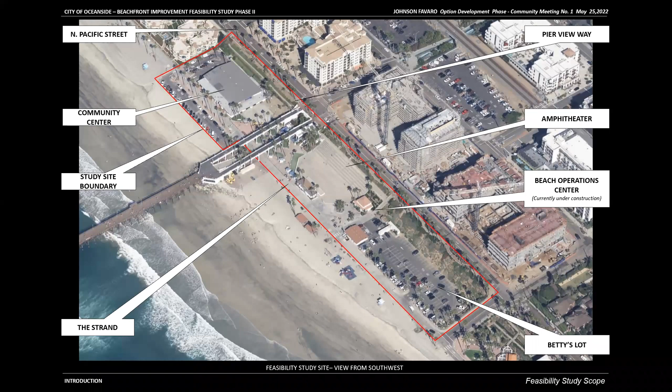I did want to stress that, to remind everybody of the boundaries of the study site. North Pacific forms the eastern boundary, the Strand the western boundary, with the community center at the north end and Betty's lot at the southern end. The goals of this study are for us, with you, to understand the needs and community priorities associated with this important site and its facilities, and also understand the current condition of those facilities.

So that's a key part of what we've been doing with you. But simply put, this is really planning for future capital projects that are coming your way. It's just a fact that buildings and infrastructure deteriorate. You know that with your own homes. If you wait till the last minute when the plumbing goes and you don't have plans, you don't know how much things cost, you don't know what you're going to do, you're in an emergency situation.

This is really just setting up a planning framework. It doesn't mandate doing anything. That's your choice, when and how you proceed. But it gives you the information you need to effectively plan for when there might be repairs, renovation, or enhancement of these facilities. So our job with you is to understand the potential scope and budget of those future projects, if indeed they ever come along.

We do have a cost estimating consultant on our team, and as soon as we gather some information from you tonight and begin to refine some of the options and narrow them down, that cost estimator will help define accurate project costs. That's a key part of it - knowing what things cost, and even the cost to actually produce the projects and run and sustain them.

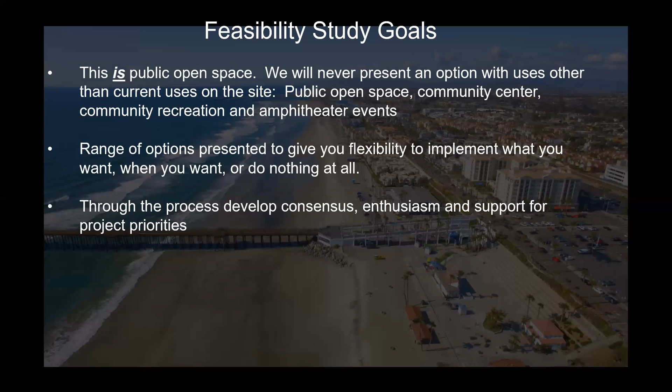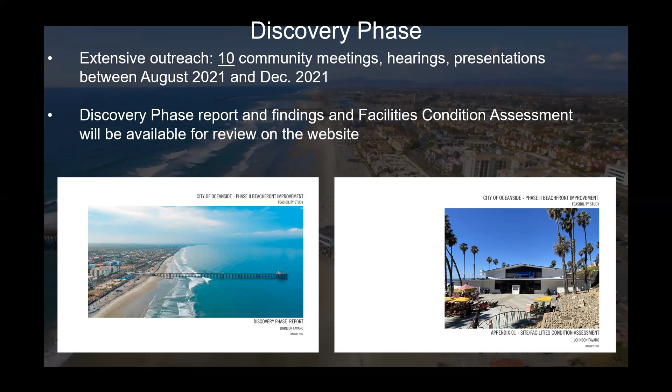I do want to remind people, I saw some people in the room who were talking to me, we did have an extensive outreach phase: 10 community meetings, all of your commissions and committees we presented to between August and December of 2021. There is a discovery phase report and a facilities condition assessment that will soon be on the website for you to review and go over the findings of that phase.

And next steps, just super briefly - following this meeting, we plan to go to Parks and Rec Commission on June 7th. And then we are proposing a second community meeting like this. We'll come back to you. This is the first of two in this phase.

We'll come back to you. We're proposing possibly June 30th, but that date's not totally confirmed. It will be confirmed, but sometime in that end of June timeframe.

And then going back after that, with that input from you at the second meeting, going back to Parks and Rec on July 12th. All of this aiming towards a tentative date of a city council study session, perhaps sometime in August.

So I think it's also important to step back. I know I heard a lot, and I said many times that I heard something new almost every one of those presentations. You were bored hearing me say the same thing for 10 presentations, but I heard something new every time. Just a quick summary - these are from my notes and things that I heard.

We heard so clearly: do not change a thing. What that means really is that the love you have for these facilities, the history tied to them, the feelings tied to them, and the families here that have used these facilities over generations - we know that and we heard that. I think that's the sentiment behind 'don't change a thing.' You love it. This is your home, this is your city, and these are your facilities.

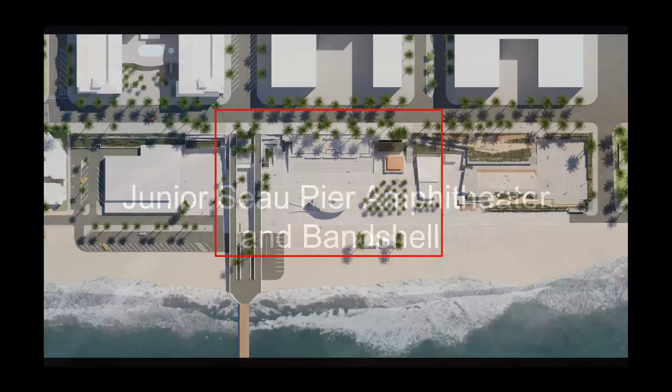So to jump right in with the options, we're going to start with the Junior Seau Pier Amphitheater and Band Shell.

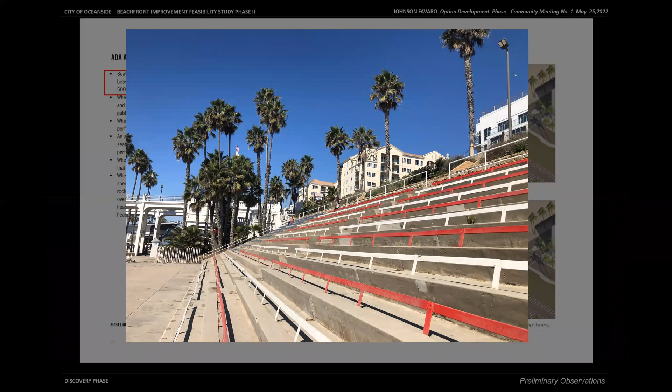First, something you know very well—I've said it perhaps a few times—the existing condition of the concrete in its current state of repair does need to be repaired because it will continue to deteriorate. So this is what I'm talking about, planning for the future. What do you actually do for the day of how you repair it? The issue of repairing a facility like that, the magnitude of repairing all of that concrete—you simply can't do it unless you address accommodation and access for the disabled. You can't spend that amount of money without updating it to current accessibility standards.

So what that means: we know with the current occupancy of the amphitheater that we need at minimum 13 wheelchair seats within that facility, and we need to distribute them. You can't put them all at the top and you can't put them all at the bottom. You've got to spread them out like able-bodied seating throughout the venue. You can't say you're going to sit here and everyone else gets to go to the stage and do all these great things—you have to distribute it through the facility.

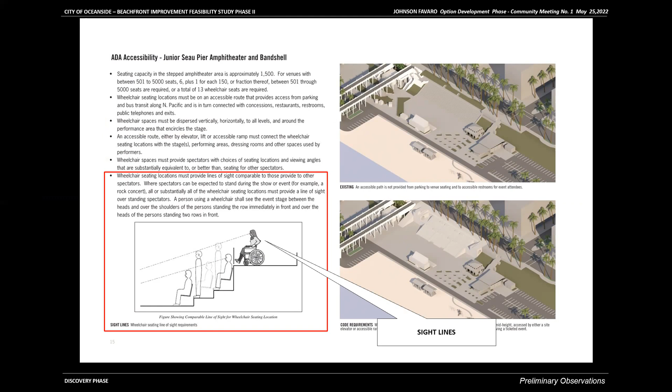And then even the geometric configuration of someone in a wheelchair—we have to take into account that a seated wheelchair has to be able to see over standing patrons in front of them. So you can see there's a kind of geometry to the steps of an amphitheater that accommodate the disabled, particularly those in a wheelchair at a performance. We simply have to take care of that with the repair of this facility. I had many people in the first meeting say, I may not be disabled, but I'm a little older and it's a little harder to get up and down those steps—I need those improvements as we go forward.

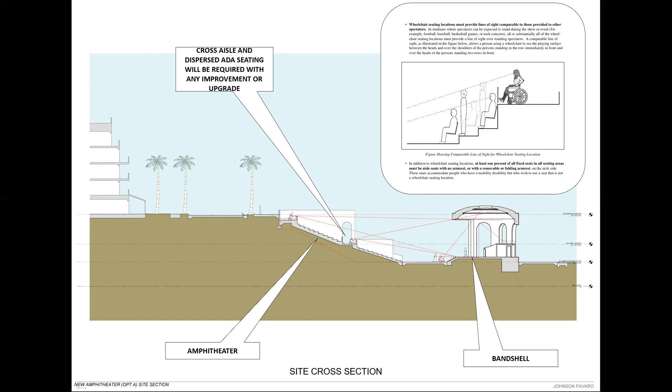With current codes, there are things connected with aisle width in terms of safety. I think many of you have probably been in the amphitheater, and if you have to leave in a hurry, imagine getting out of those narrow aisles—it's not as safe as current standards would require. There are code requirements in terms of the number of people in a row and how wide the aisle is to get by them. So we simply have to change the rake, or steepness, of the amphitheater to bring it up to current code.

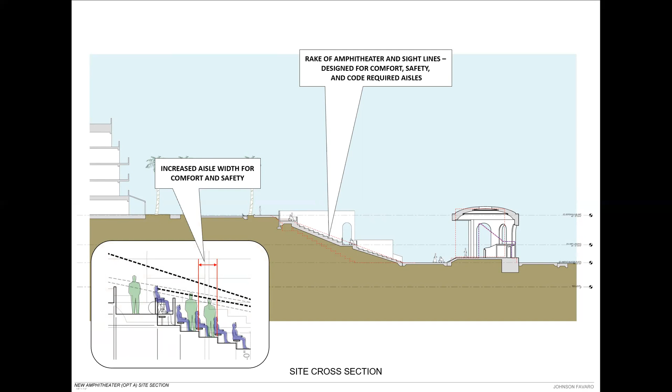And that's also an issue of comfort. Just to say, and we heard that as well, make the facility more comfortable as well as we potentially move through it. The band shell itself is about 24 feet tall.

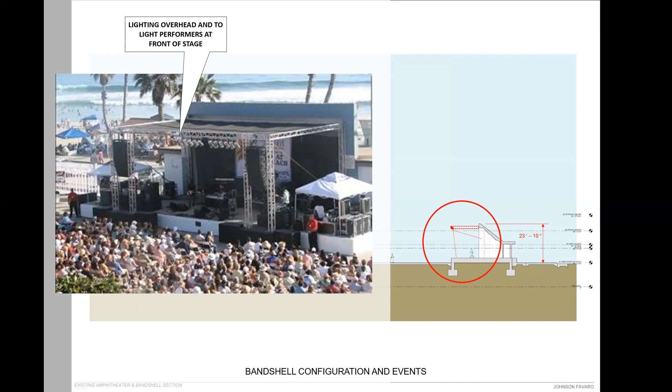You can see in this image, it's doing incredible work, but often the infrastructure that supports an event just has to hover and be hung outside of the existing band shell. You see the speakers there on the left—equipment's always kind of moving outside of the stage volume. Rigging often has to be built for just the simple function of getting lighting on a performer's face at the stage front. So every time that happens, you build the rigging, bring in the lighting, bring the speakers. It's typical of these kinds of events, whether community events or concerts, that ideally there is overhead rigging already in place supplying the lighting and sound equipment, so that you're not building that rigging over and over again.

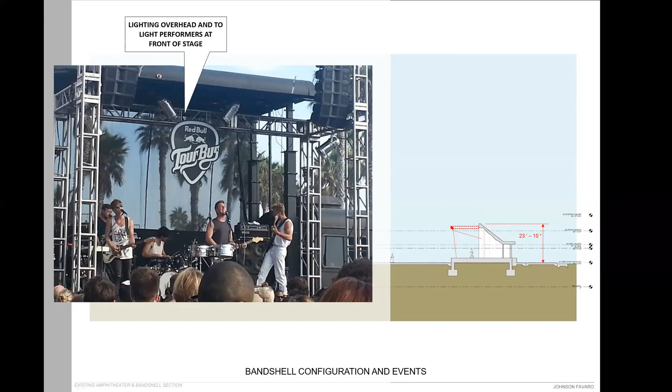You've had many occasions where the rigging exceeds the height of the band shell itself, the equipment spreading out to the edges, and even the creation of what we call a sound mix station to control the audio and visual connected with any event has to be created each time.

As we consider what we do with repairing this amphitheater, how to bring it forward to accommodate the technology that supports the community events, the festivals you currently have there, as well as other necessary events—so we do have a theater consultant on our team, and he gave a recommendation.

I want to emphasize, this is just a recommendation, not a hard and fast rule, but he gave a recommendation of a stage volume—meaning the interior space between the lighting overhead and the stage floor, and the front, back, and width of the stage—and that's 40 feet wide by 30 feet deep and 30 feet high.

And that's tied to what he knows, if you look across the spectrum of the kind of people who would use this premier facility. This is an amazing facility with the Pacific Ocean, as you know. The people who want to use that—what are they expecting in terms of the stage volume? This does matter in fulfilling that need for you.

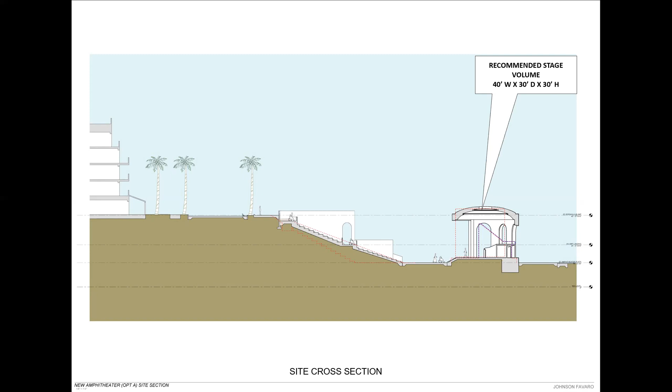But again, it's not a hard and fast rule. It really does support potentially the kinds of acts that could come here, but also just simply, it gets all of the people on the stage well lit and in a way that people can hear them and see them, viewed from the amphitheater seating. That is the goal.

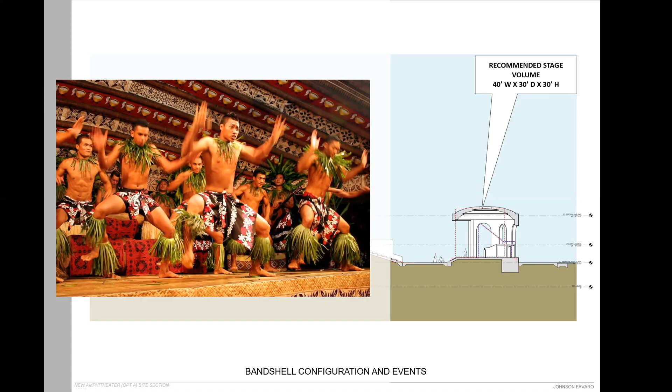So the band shell itself—if you look across this country, perhaps even the world, you'll see band shells that span from traditional on one side to very hyper modern on the other. But certainly we have to start with what you have and know what you have.

In one of the commission meetings, it was said, and I think this is accurate, that it has an Art Deco kind of influence to it, the kind of stepped shaping of that proscenium stepping back. And it is white, which ties to both the pier bridge, and also ties to what we think is a historic architectural legacy here of Irving Gill, followed up by your Civic Center. There's a certain materiality that it ties to those things.

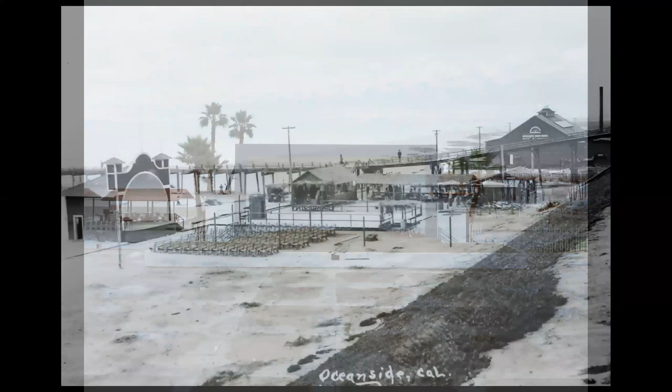But it's interesting—when we step back many years to the first band shell, it was a completely different band shell, much loved, I'm sure, by its community at the time, but it was even replaced by a later band shell at another time. What I think is most interesting, when you look at all of those band shells, including the current one, is that it fits so nicely into these incredible community band shells across America that were primarily built at the beginning of the last century.

And they were kind of significant architectural pieces. They were prized places, often in wonderful locations like yours. Not huge in size, generally modest, but certainly important civic places. And we think that's the lineage of all these bandshells you've had in history, along with the one that you have.

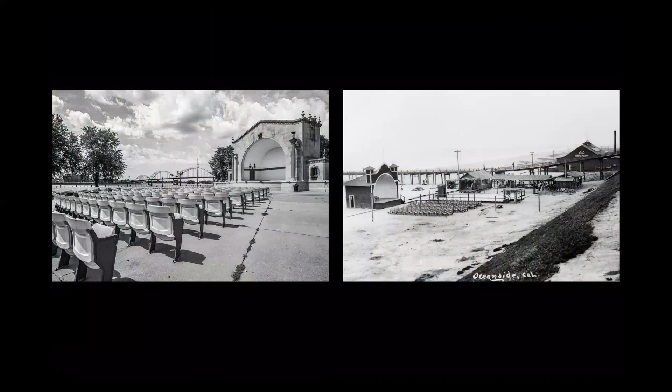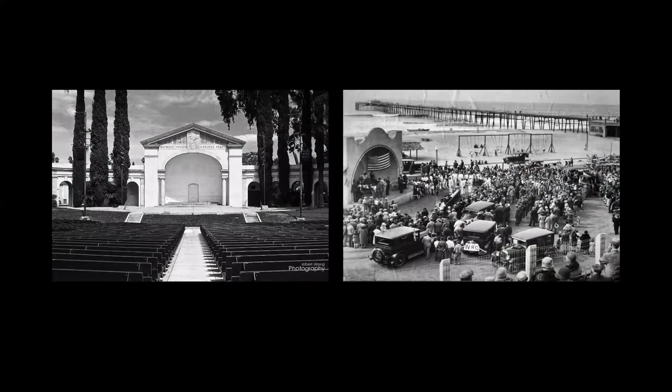So I hope you can kind of see there's a similarity. We're not talking about design, but I think you're seeing that these civic structures, these places of pride, are common to how bandshells have been created, both in your city and around town. All these weird looking examples are us trying many things here, but this is not design. So I'm going to present a concept of the bandshell, just for consideration, so we can talk about its general properties, not its specifics.

You may say to me, I hate arches, I don't like white, whatever. But one of the things we want to put to you is, is there an opportunity to open it up to actually see through to the ocean, to see through to the sky? Because much of the day, much of the life of the bandshell, it acts as really a pavilion within this important public space. So being able to sit in that plaza or in the amphitheater and see through to the ocean and the pier, we think could be an advantage.

And we have ways to close that for a performance if needed, or open it for a performance. But we think it's something for you to weigh in on. Do you like the idea of potentially opening it up so it's not a formidable structure that blocks this incredible setting that you're in?

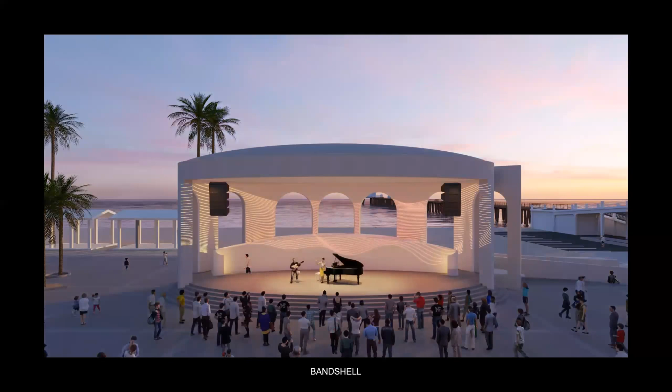And then how it changes with lighting during the day, and how it supports the events that are there. We know graduation is such an important event here, and we really need to have it accommodated back here. So clearly that size and dimension I'm talking about is tied precisely to these kinds of events, so that they can be easily accommodated on the plaza and the bandshell.

So this bandshell is kind of a simple design in some way. The concept is that slightly domed area — it's that dimension that's giving us the dimension for the lighting. It's bringing it to the front of the stage, and it's not built into this model, but it's that dimension that gives us the clear volume we need below the stage.

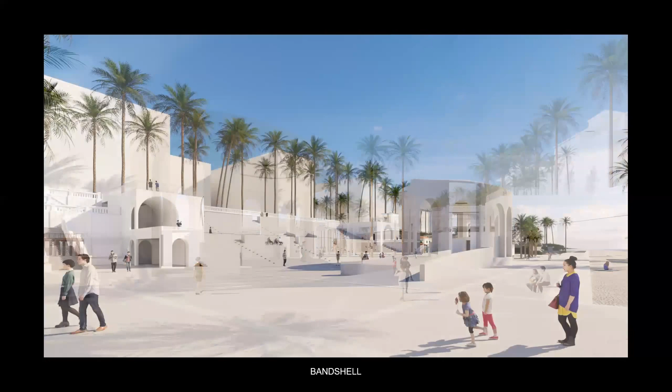Looking at it from the Strand, we're providing an accessible ramp just to provide accessibility for the disabled, but it's also necessary to wheel equipment up onto the stage. Moving parts at the beachfront is a difficult thing, so just having a simple accessible ramp is there.

And we've built in about 500 square feet of what we would call back of house, for essentially a green room, a restroom, and some dressing rooms that can be configured there. Lighting and control panels are all built into that, and yet it still maintains that openness over the top. And then we're building in even additional storage. We've heard over and over, for all of the events and festivals, that having storage on site available to you is important, so back, built in under the seating I'm going to show you, is additional storage as well.

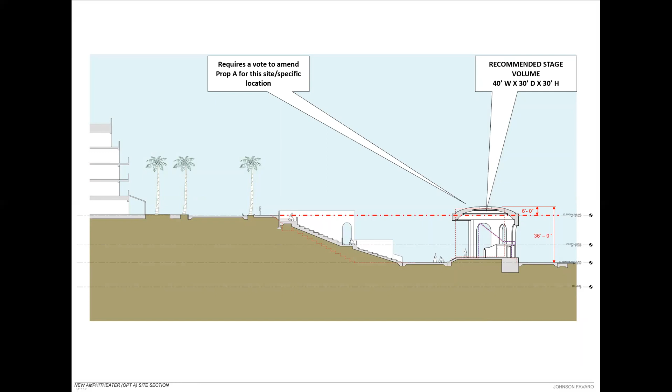That volume extends about 6 feet above the elevation at Pacific Street. You have Proposition A, which requires that if a recommended height is important to you, we'd need a vote of the people for a specific exception or amendment to this particular site for the band shell. That's your choice, not mine. My job is to show you a recommended volume, but we can't leave it there—we're going to show you an option with reduced height, capped below the elevation of Pacific Street. It can work, but there are advantages and disadvantages to discuss.

Here's a view of the full height. There's really a 6 foot difference, and it's precisely that domed area, that shallow dome, accommodating the lighting. Here it is at full height, the recommended, and there it is at reduced height.

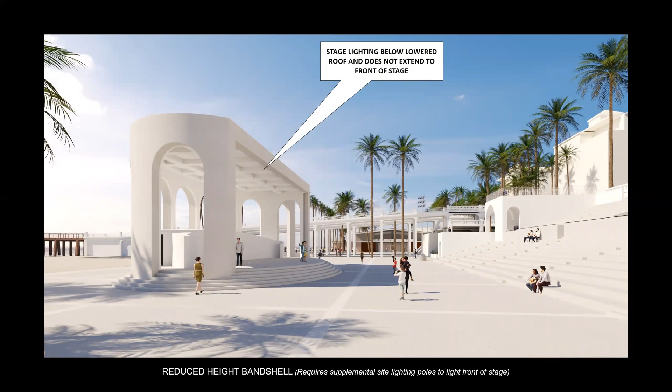In the recommended volume, the lighting is nestled up into the domed volume. When it's brought down lower, we felt that extending that lower elevation cuts off the view from the higher seats and makes the aperture, the proscenium of the stage, too small. Looking down from it, extending that eyebrow to get the lighting out front just made it bulkier. The point of this option is to make it a less bulky band shell.

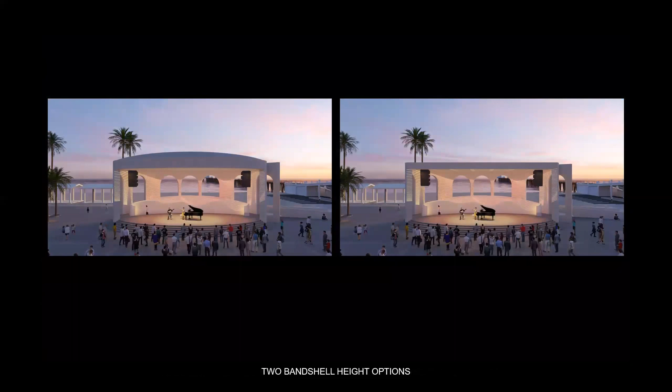Hence the addition of the slender light poles, which would provide lighting to the front of the stage. Looking at the taller recommended volume compared to the reduced one, it's really a 6 foot difference, and it's for you to tell us your feelings on that. It can easily support performance—there you see the two compared, the reduced height volume accommodating graduation, side by side for events. That's one of the options we're asking for your feelings on, in terms of the compromise or willingness to engage in a vote of the people on Proposition A for this one location. Your choice, certainly not ours.

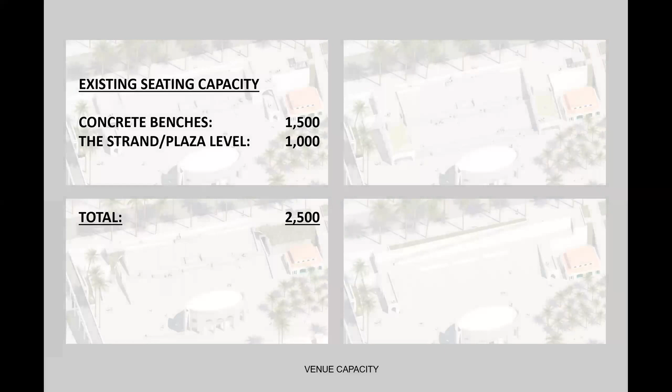Talking now about the amphitheater itself, the seating. We start with just the capacity. There are currently 1,500 seats in the concrete benches, and about 1,000 we heard from staff is typically the capacity of the plaza level or the Strand level, for a total of 2,500. We're going to focus tonight on two options, A and B, for seating.

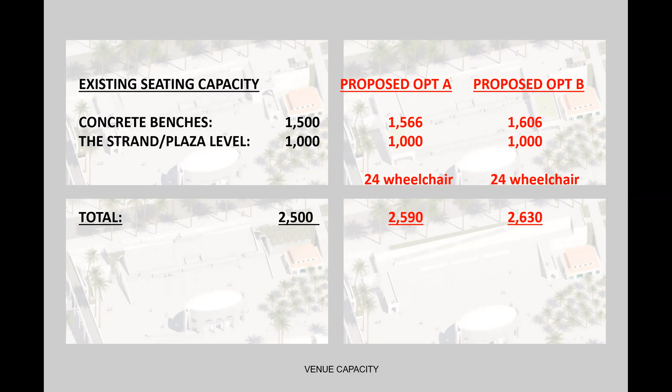Both options are generally close enough to be basically the same. The good news is we're holding to the same capacity, even though we've had to reconfigure it for comfort, safety, and code. We've held onto it and added the wheelchair seats necessary going forward. We studied 4 configurations; I'm going to start with option A. We'll ask you to weigh in on your opinion between A and B during group discussion, but again, it holds to about the capacity of the existing, pretty close to it.

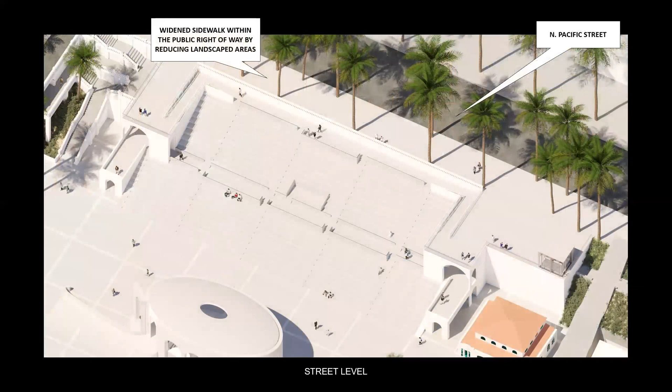It shows the code-required wheelchair seating at the higher level and at a mid cross-aisle level. We have to provide, in the corner, a disabled access site elevator—we need an elevator to get you from the street to your seat, meaning to a wheelchair seat, and from your wheelchair seat to the stage at the Strand level, going the other direction, plus to restrooms, parking, etc. What's proposed is essentially a site elevator you see off to the right there.

So I'm going to look at it now from the top down, a bird's eye view of the amphitheater seating, and take it apart level by level, starting at the top.

So one thing we heard was potentially widening the sidewalk. This doesn't mean encroaching into the bluff, but within the public right of way as it currently exists, reducing the landscaping so we can increase the paving. One reason is that there are a lot of people coming and going for big events like Ironman, ticketed events, and festivals, constricted to a relatively narrow, currently paved sidewalk.

I'd add that this is a performance venue, but it's also a public venue, and people should have the right to stand on that sidewalk without paying for a ticketed event and see what's going on below. Giving a viewing place that one doesn't have to pay for to be part of it is an important piece. So that's one reason to consider widening the pavement along this facility.

I'd point out, and this is part of our dilemma with the elevator, because I know that's what everyone's thinking about - what are you doing putting an elevator here? But we're wedged between the existing pier bridge stairs, which we cannot touch, and the recently completed Beach Operations Center stairs. There's simply not enough room to ramp from top to bottom into all the seats, which I'll talk about shortly. Hence the disabled access site elevator. It does extend 13 feet 4 inches, because that's how elevators work - they have an overrun. So it's another structure that extends within that zone of Prop A, meaning there would need to be a vote by the people to allow that exception to provide disabled access to the site.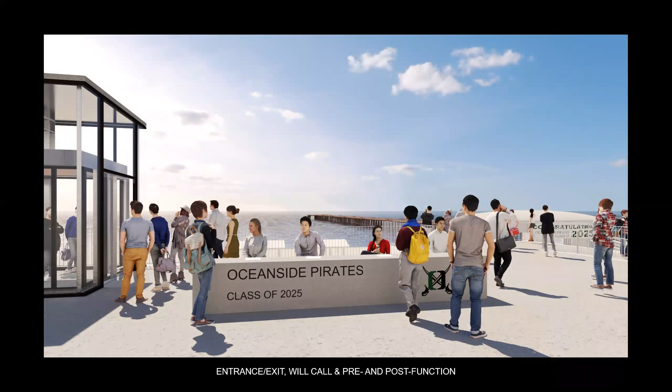We're also showing, with this option, on the two sides of the amphitheater seating, two larger terrace areas, because again a lot of people are entering and exiting this facility. So off of the public right of way, off the sidewalk, there are terraces for things like check-in and will call, for the concentrated movement of people entering and leaving a performance. Here you see a view of one of those terraces on the left with the site elevator, useful for check-in or graduation with the number of people arriving at one time who have to make their way into the venue.

We also think it's just a nice way to enter the venue. You come to that point, look down to where you're going, look out over the scenery, and maybe see what you're entering before moving down into it.

Again, we're distributing the wheelchair seating at a cross aisle at mid-level and at the high level, accessed by ADA ramps. Building in, we're now cutting down a level in the plan. So we're looking at that cross aisle level that links the disabled access elevator to the mid-level wheelchair seats, and it's at that level we would build in the sound mix station for the amphitheater, without losing seats compared to existing capacity.

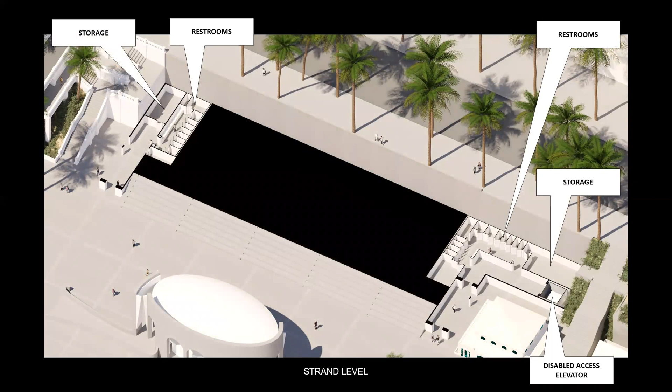Going one level further down, I should add restrooms are built in under the seating. These restrooms let people just get up and not leave the venue entirely, but go to a restroom and come right back to their seat, as is typical in any amphitheater or bowl setting. When not used for an event, those restrooms can just be shuttered and secured so they're not open for any other kind of behavior - they don't have to be open all the time. We're also building in some additional storage, because storage is what all of these facilities need.

When you get down to the Strand level, there are more restrooms, again for the people in that lower section to access, and also access to the disabled access elevator.

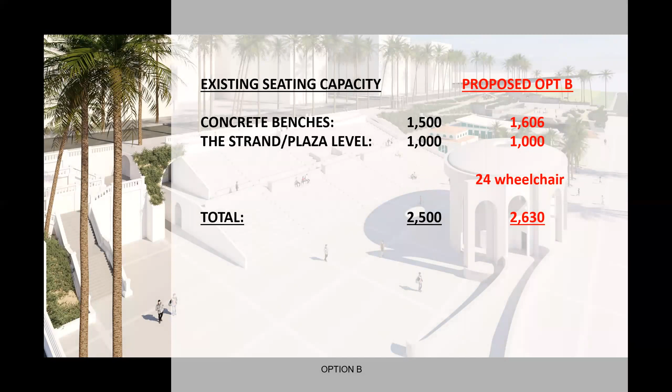Again, entrance and exiting, looking at it from the other direction, those extended terraces that extend off of the sidewalk at Pacific. But we did hear, and we did think it was important to look at another option that has less bulk and pulls back those terraces, essentially bringing them back to a minimum. It turns out that option, which we're calling Option B, provides even a little bit more seating, about 2,600 seats versus the 2,500.

So starting back with where we last left you with A, remember those big terraces. This option's all about pulling that back to a minimum, just enough to get into the elevator and to the ramps that take you to the seats. It's reducing that by 17 feet, essentially pulling it back. The profile of the bluff mimics the adjoining coastal bluff built in there. So this scheme essentially pulls back those terraces to reduce the bulk.

Here's the first option I showed you, A, with the entrance and exit areas for managing a lot of people, essentially pulling it back to as slim as it can be, just to get you off the sidewalk, into the elevator and into the venue in a minimal way, so that the profile can remain very close to what it is today.

I do point out both options require the disabled site elevator. There's no difference between the two options, and that required amendment to Proposition A for the disabled access to the venue.

Again, looking at it from the other direction, the extended terraces pulled back to just the minimal dimension, retaining the hillside slope.

Going through this scheme, the same widened sidewalk is the same. The reduced size area for entering and leaving gets you down to the wheelchair seating or into the elevator, cutting down the level. Same story, but we're now tucking the restrooms in again under the seating because we have less room on the sides, but it works. And then adding restrooms again at the ground floor and additional storage.

We did look, just to be thorough, because I know it's in all of your minds, at this elevator. Why do we need this elevator? Why do we even need to consider amending Proposition A for disabled access? Why do we even need to think about that? It's worth talking about. One thing we looked at was, can we just push this elevator down?

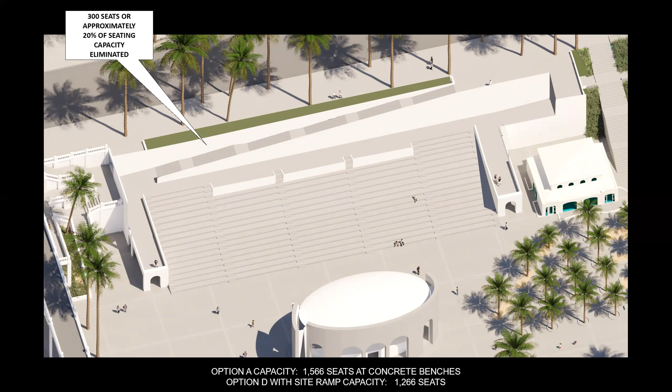Can we take that volume and push it a whole floor down so I enter it at another level? But what that means is I need 200 linear feet of ramp to get 13 feet down to access that elevator. And to do that, I lose 300 seats, 20% of your seating capacity, just with circulation, just to get me to the elevator that provides access. And besides, it's a quite mean way to tell a disabled person in a wheelchair, you've got to go 200 feet trucking up and down this ramp to get to the elevator that's supposed to provide you access to this facility.

So for those reasons, primarily because of the capacity and the fact that I don't think it's feasible for elderly or wheelchair bound people to navigate a 200-foot ramp, we think this is not an option really worth considering because of the loss of capacity at the venue.

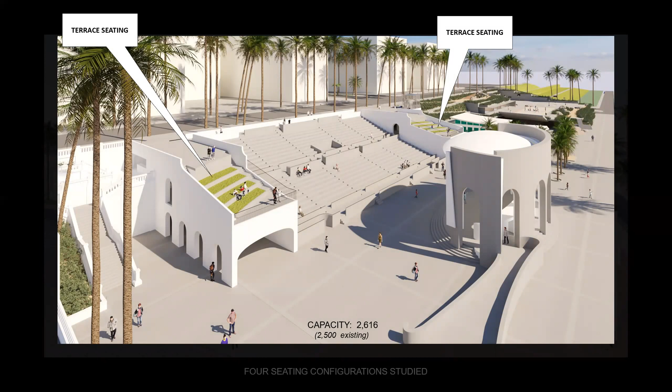As I mentioned, we also have a theater consultant, and he had an idea for a different type of seating, what he called terrace seating. Could we offer the opportunity to put grass areas on these flanking areas with views of the stage, so you could bring a blanket or a table with your family and look at that? It sounded quite lovely, but many people saw it as an opportunity for camping at the beach in a way that wouldn't be allowed. It also had greater bulk, and that doesn't seem to be the direction we should be going. So that's also not an option, but we wanted to show you we did look at and evaluate that.

So the two options are A and B that we're going to be asking you to weigh in on. Option A has the larger extended areas for entrance and exit of large numbers of people from a heavily attended event. Both require, there's no difference between the two in terms of an amendment for Proposition A for the site elevator. So that's an important discussion point for you this evening. Both of them require that.

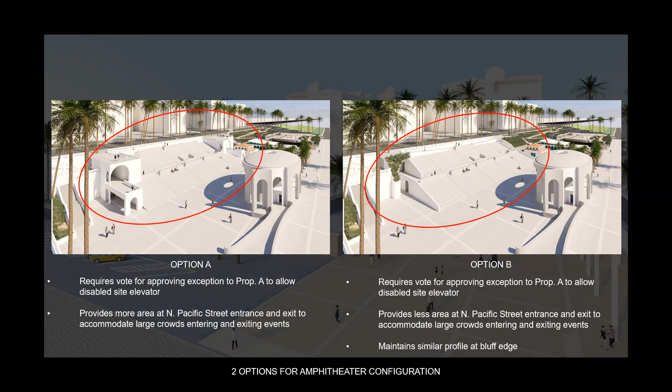I'm trying to point out to you, I don't think there's a ramping solution. There's not a funicular solution. This is way too much capacity, too many people moving at a concentrated point of time during an entrance and exit for other solutions than a site elevator. This is how you essentially are providing disabled access and ease of access to this facility.

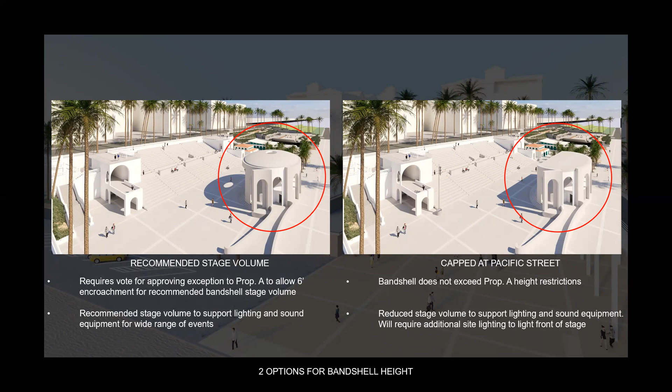And then we also have two options for you to consider: the full height band shell option, as well as the lower height option capped at Pacific Street.

So turning now to the Junior Seau Beachfront Community Center. As with that, we studied several options. We started at the minimum, which quite frankly is where you started with me as a community: just fix this up, we love it as it is, clean it up and open this facility. So this option is really a renovation with no real structural change to the building, and I'll explain a little bit what that means later.

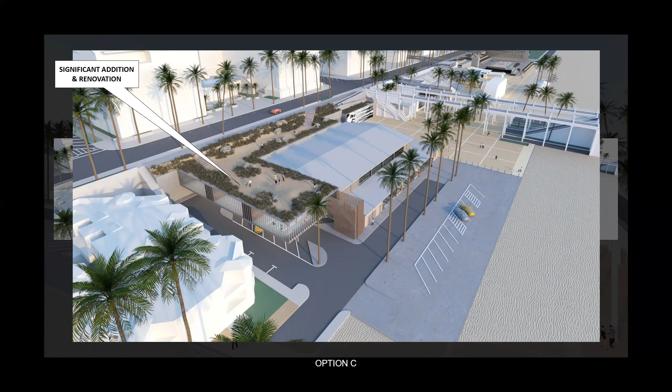But then we studied how to address some of the issues—number of community recreation classrooms, lack of storage—how could we make a modest addition and renovate the building. So we studied that, and then we studied a more significant addition. Remember that comment someone made, let's be creative about the roofs? A more significant addition, including a renovation, all intended to preserve the visual integrity of the building as seen from the front, and kind of hide this increase in floor area in ways that you don't see it.

So now switching to look at the plan, we are coordinating with the separate pier bridge project. We do know it's anticipated, not decided yet, that they have to create their own ADA ramp to provide disabled access to the pier. So they have to get down the hillside some distance to basically get to their elevator, which provides access to the pier. So that's something being contemplated, not settled yet 100%, but being contemplated, and in coordinating with them, we have shown that here.

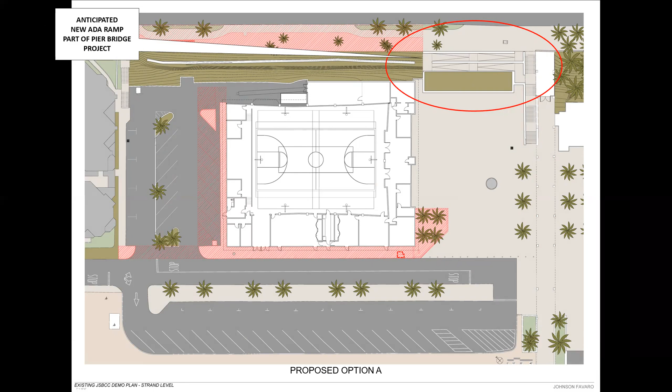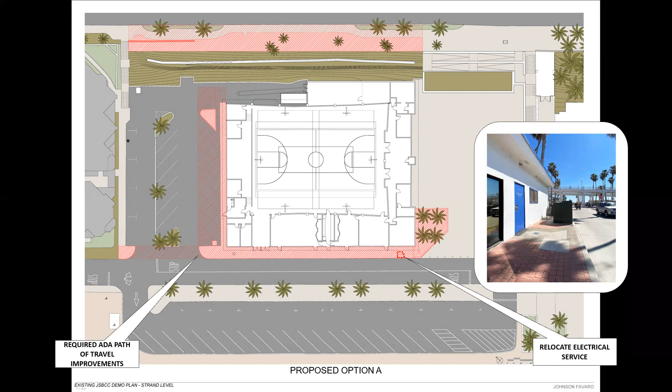But in connection with renovating this building, there are certain things we absolutely have to do—it's back to accessible path of travel and rendering code compliant access for the disabled. I have to get you from a disabled parking space to the entrance of the building; that's an obligation of spending any money on this building. So we have to remove that electrical transformer and create a safe passage along the sidewalk, code compliant, from the disabled parking. We will end up, when we add the van accessible space we have to have there, losing one space, but I think we have other ways to add to that capacity operationally in terms of the other beachfront parking there.

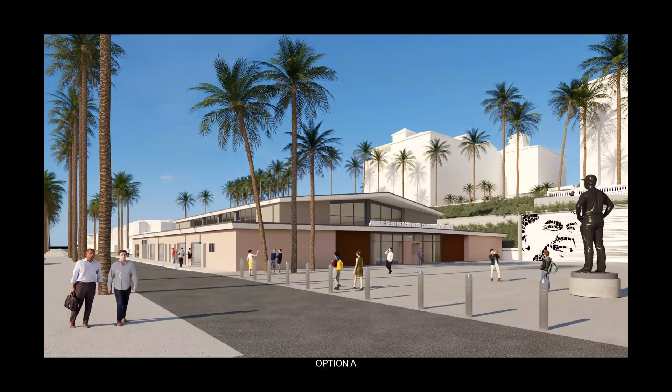We would say that part of this renovation has to include the gutting and replacement of the restrooms with new restrooms that essentially accommodate the disabled, but also have sustainable water fixtures, et cetera. And then we can really go quite a long way with cosmetic, non-structural improvements, repair of the building systems, even replacement of the glazing to let natural light into the building, to essentially bring it back again to an amazing version of itself—go back in time to its history, sort of back to the future, bringing it forward with potentially new windows that actually let light into the building, so you can tell what time of day it is and you can actually feel like you're at the beach.

Addressing with signage, the legacy, the naming of the building, making it more prominent, and even using public art as part of the wall that's completing the pier bridge ramp could be an opportunity. We heard this in the input for public art, for murals to be created on the site, even a statue. Cleaning up the plaza and opening it up for all of the events programmed in the community center so that it is an effective plaza connected to it.

Keep the building as is, with many asking for a refresh, as many of you certainly requested. Keep improvements minor, stay away from structural, because essentially touching structure in this case means I have to rebuild the whole building. It's just like the pier in that regard. If I touch the structure, I own it and I have to rebuild it.

And the magnitude of that is going to trigger a lot of things with your California Coastal Commission in terms of what we're doing. So by staying below the radar, there's a lot we can do with this building in terms of improving finishes, improving systems, putting in new glazing, updating it, refreshing it, bringing it back to a period where we give it new life for the next generation. We think that's our clear recommendation for you, to stay below that threshold that will trigger the kind of scrutiny that we do think will be an issue.

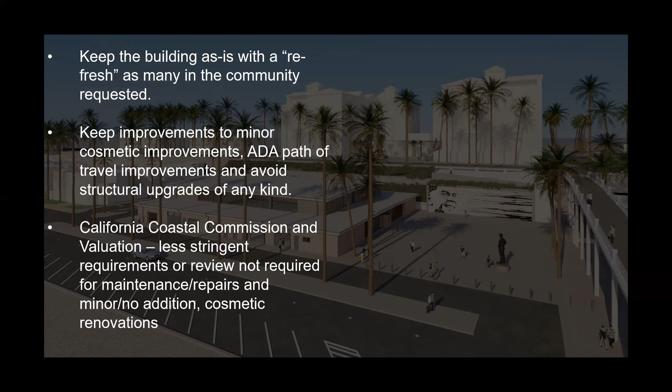But it's super important to point out that even if we do all of that and make those investments in that building, we still have an undersized gym and haven't changed the amount of court space with this facility. And that's fine, we can't do it all here, nor would we try.

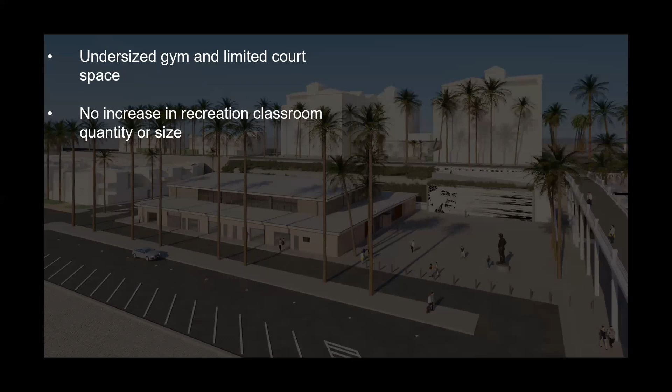And there is no increase in recreation classrooms. I can't change the size of them because, again, if I touch them, I touch the structure, and anything I touch, I have to rebuild. At the sea level location that it is, foundations of rebuilding there and all of these things, these are the issues. So no real increase in the recreation classrooms in terms of quantity or size.

And then the thing is, the building still remains at sea level. So prudent planning for anyone really has to understand what that means for us as we move forward. That's off into the future, and it is worth investing in this building to bring it forward. We just have to understand that at some point there can be intrusion there, which will change the condition of those. And importantly, as far as the California Coastal Commission, by the year 2100, there could be 7 feet of eventual sea level rise, just a projection. These are factors to consider as you think about your investments in this building.

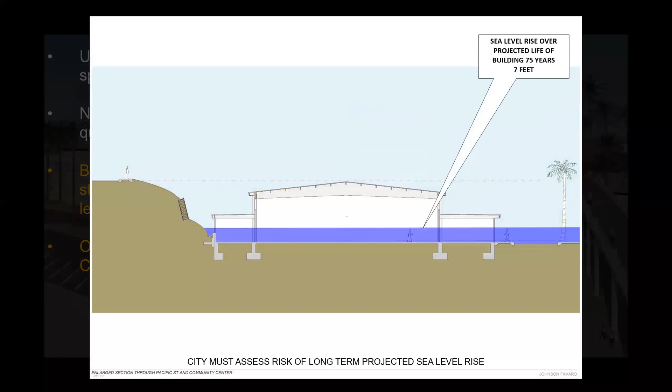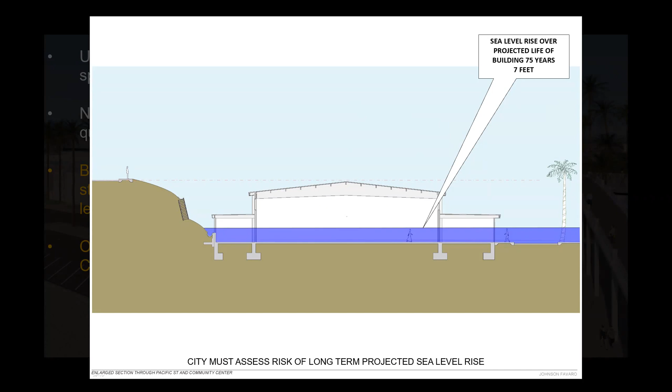I'm going to say to you clearly, 75 years, 100 years is a long time from now. We can really extend the wonderful life of this building, and maybe nothing will ever happen to it. We can extend the life of this building in the way you asked as we move forward with it. So we do think that is the recommendation for this building, and that's in complete keeping with how you said to us that we can bring it forward to the next generation.

Now, the next thing I'm going to show you, I'll say right off the bat, this was not identified as a community priority, a community interest, a community wish list, nothing. You wanted us to study the amphitheater and the community center. But while we were at it, to be comprehensive about this, and given that I can't increase the number of recreation classrooms or the court space with the community center, we wanted to take a look at what we could do in a sustainable way that reflects sea level rise and how one builds at the coast to potentially anticipate that. What could we possibly do at Betty's Lot and provide community recreation and public open space?

So I'm going to start with just an aerial view of the lot, which is essentially 104 parking spaces when the Beach Operations Center is complete.

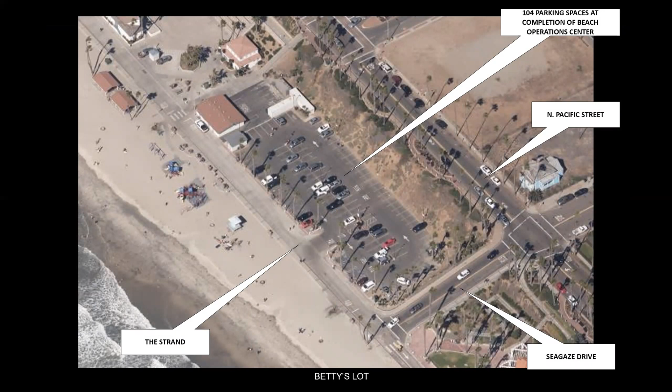So this is the same view of the study. I'm going to take it level by level. Right now we're at Strand level, right at the level of Betty's Lot. Those cars you see parked there are the Betty's Lot cars, right at that level, not below it. By reconfiguring that, we can increase from 104 to about 128 spaces, right at that level, no change.

And then essentially on top of that, move up a level, I build a park. I deck over it 12 feet above sea level, a hardened concrete structure that would withstand the waves. Water rushes into the unconditioned garage, rushes out, but above that level is a public park, a public space with 2 regulation cross courts and 1 center court there, outdoor basketball courts.

So in addition to community recreation, pushed to the rear of the site, we can create 4 recreation classrooms at 1,200 square feet. So we can add to your inventory of community recreation that would add to the Junior Seau Beachfront Community Center, potentially 4 classrooms. Now I'm going to stop right here.

This is just a planning thing way out in the future. I don't pretend that this is anything that's on anybody's radar or that there's any stomach to take this on, but this is just so that one can see what the potential possibilities are. It's totally fair for you to say, that's not for us, we're not doing this, we don't need this.

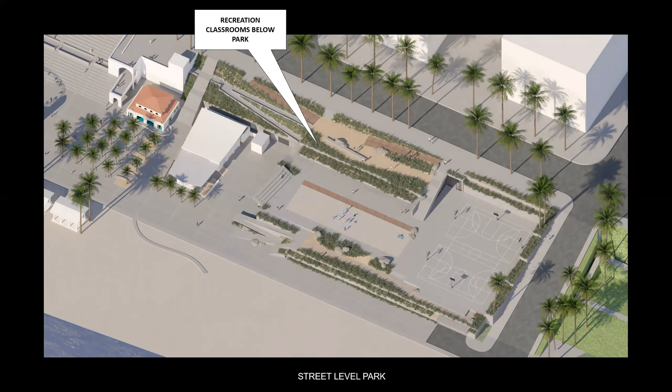So here's an aerial view of that. Again, intended to just be a stepped terrace building that's essentially a planted roof over most of it, with outdoor space, including a sand area for volleyball, for sunbathing - you could put an ice rink there in the winter, you could have a volleyball tournament at times. There could be additional stage space adjacent to that, and obviously the basketball courts at that same level.

Now I'm going to say one more time, that's 1 level, 12 feet above the existing. All the Betty's Lot parking is right there below it, 128 spaces. This is 1 level above it. It's essentially what is done many times, building a park over parking. And it's for you to say to us that's of interest to us, to increase open space at the beachfront for our use, or it's not of interest to us.

Design's not the issue here. It's really just the concept of sustainably building at the beach in anticipation of sea level rise, putting no critical infrastructure below 12 feet, no mechanical systems, no electrical systems - all conditioned space is up above, and we increase open space. We have parking and we have open space. We think that's something that adds to, it's not instead of by any means, it adds to the Junior Seau Beachfront Community Center in terms of community recreation and meeting spaces at this site.

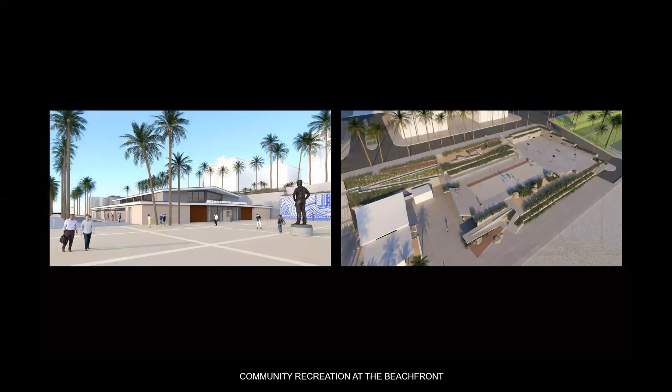So I'm going to pause here for a second. You'll have to excuse me as I navigate. I've got a couple of animations that just show what those 2 options that we're asking you to evaluate would look like as seen from beachfront - I'm sorry, from Pacific Street.

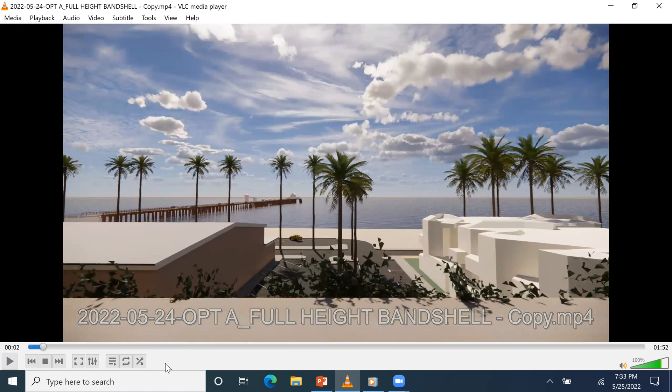And Brian, where are you? Oh, here we go. Oops, let me pause this. So this first one, let me get to full screen. I apologize for navigating this.

So this first one is as if we're right on the sidewalk of Pacific Street, and we're kind of walking down the sidewalk. So we're starting at the community center side, obviously the pier in the distance. So I'll just get this going. And this is option A with the full height bandshell. This is all about understanding the vista as it exists. This is existing - we're doing nothing to the community center parking lot, the community center building itself.

We're doing a lot to actually improve its appearance, but not changing its configuration. Huge improvements, we hope, to the plaza to really enhance the utility of that plaza.

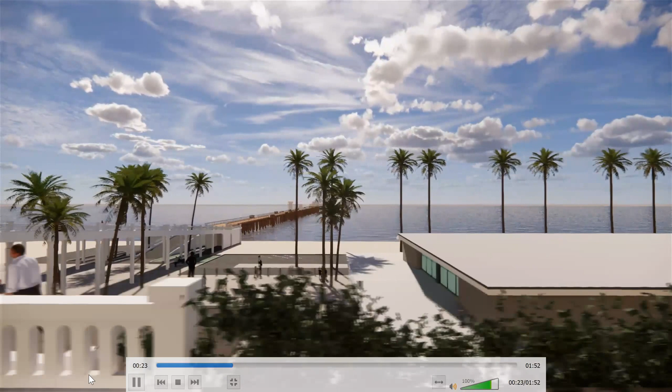Here you're seeing a rendering of how that ADA ramp that provides access to the pier bridge picks up on the historic architecture of the pier bridge in terms of its railing, along with the pier bridge steps and those extended entrance and exit ways that provide access.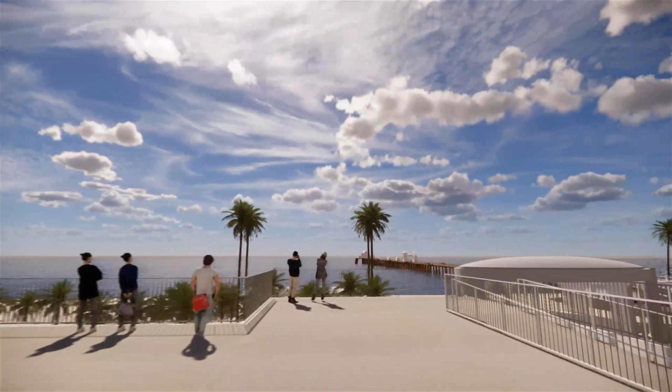Again, that's the full height band shell. We're now moving along Pacific. Those wheelchair seats are just down below me. The other extended area, where you see the side elevator, you can walk out there and look up and down the coast.

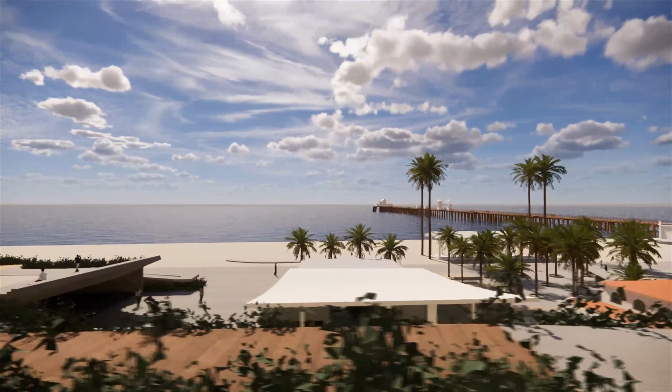Beachfront Operations Center, or the Beach Operations Center, I should say. Again, the side elevator—it is a building, totally enclosed and conditioned. Stairs down to the Beachfront Operations Center, and then the open space allowing access between the open Betty's lot parking lot below and the vehicles that have to access the Beachfront Operations Center.

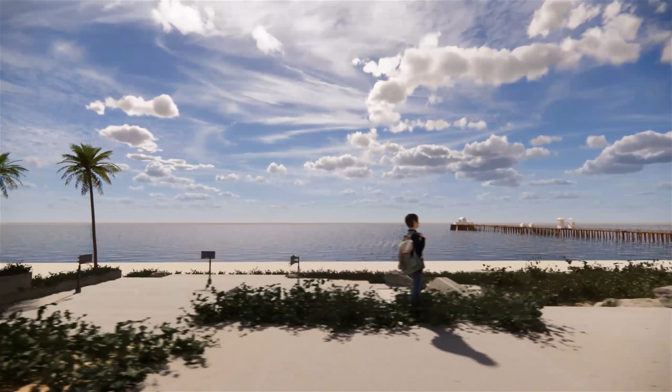And then essentially the terraced recreation of the coastal bluff, looking out over and maintaining the complete vistas of sand and water edge as seen from Pacific Street, the new outdoor basketball courts, and then ending up in a moment at Seagaze Drive.

The second animation is of Option B. Remember I said we pulled back the terraces and we have a reduced height, so now I'm going to show you that one.

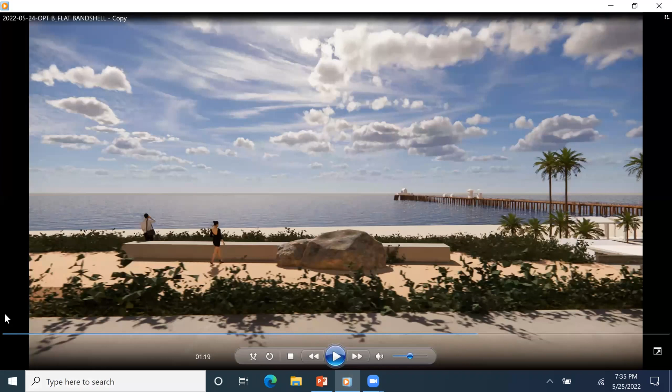Whoops, what is this? Just one second. Oh, there we go. Started at the beginning.

Starting again at the community center parking lot. The building itself with really no change to its massing or configuration.

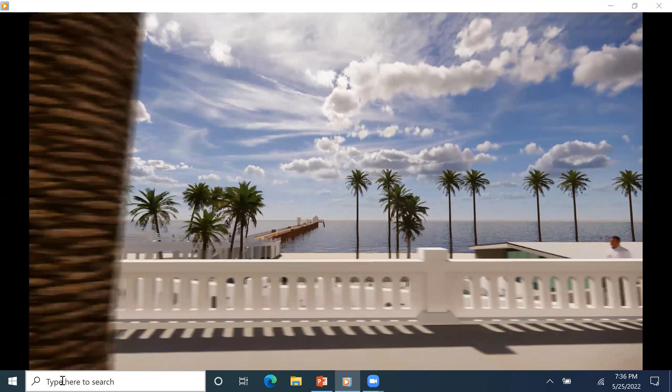New plaza opened up for use to support the events there, the accessible ramp to get you access to the pier bridge elevator, and the pier bridge itself.

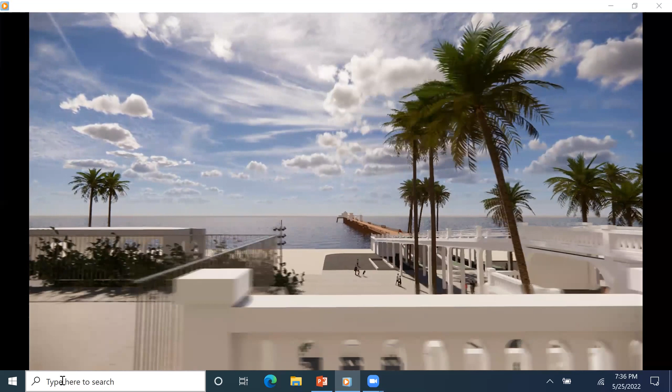Now you're seeing not those extensions of the terraces, just the extensions that get me to those ramps down to the wheelchair seats, and the reduced height band shell that's 6 feet lower.

So this is Option B. We just need enough room to get on the elevator and get down that ramp, so those are pulled back.

You see the elevator again, and really the Beach Operations Center—nothing different with regard to the study we showed for Betty's lot.

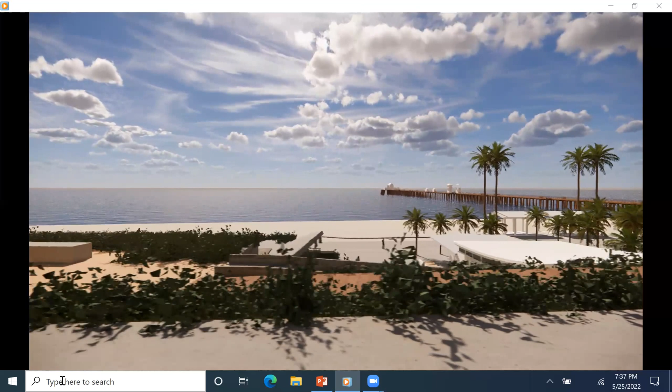Open again to the Beach Operations Center and the parking so people can leave and enter the parking easily. We have no need for a side elevator there because we have a lot of room to do ramps, so it's like a beach trail system that gets you down to that park and back up. We have no elevator there—it's a super simple condition that basically replicates a California coastal bluff in terms of making your way down to the mid-level park and basketball courts.

And then Seagaze Drive.

So what we're going to do—Dara, I wasn't outside—do we have people outside watching, or is everyone in here? Well, so this is where we're fast on our feet.

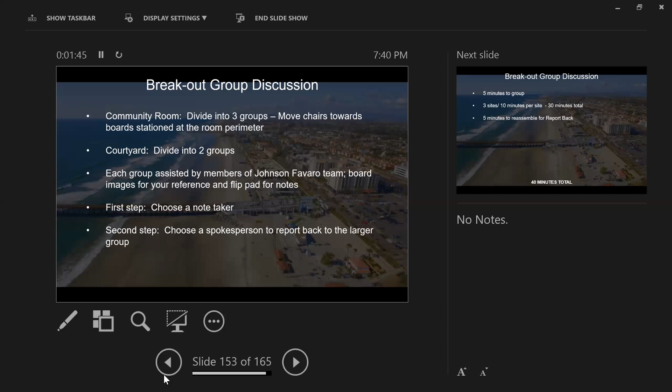The second step is we're going to ask you to choose a spokesperson, someone within your group who's going to come up and report back to the larger group after the discussion that we have.

We're going to allow about 5 minutes for everybody to push the chairs around to get to the corners of the room. We have 3 areas on the project site. We're going to spend 10 minutes per area, 30 minutes total, then take 5 minutes to pull your chairs back around so we can wrap up and hear the report back.

It's really simple, you can say whatever you want, but we'd like to cover all 3 of the study areas that I presented and discussed. What we want to hear, as I said at the beginning, is what do you like, what do you dislike, and just as important, what are your suggestions.

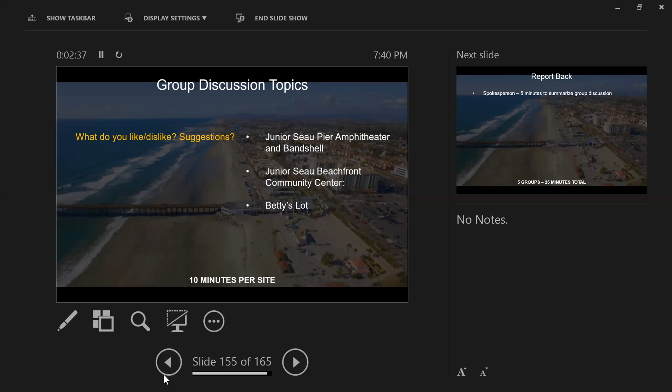It's super easy to just say no all the time, it's really easy to do that. But it's most helpful to hear your suggestions of how any of the things you've seen tonight could be improved as we move forward in this process.

Then we'll wrap up with a report back. The spokesperson will come back up here with the flip pads and summarize for the larger group what their group had to say. So this is the workshop portion of it.

40 minutes puts us reconvening here at about 8:20. So we'll pull back around at about 8:20. Thank you all again for your patience.

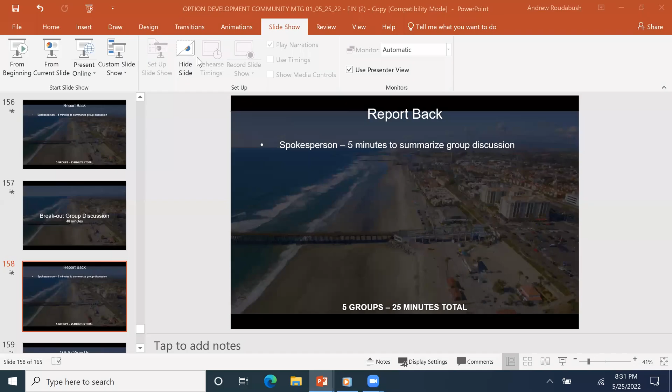And then we can fix that. Click display settings. One more time, and then duplicate slideshow. Perfect, and it resumed the recording, so we're good. So if everybody, you can kind of just pull back to the... so everybody, we're gonna... oh, I'd love to, thank you.

All right everyone, we've kept you here a long time. Let's come back, I'd like to hear. So we're going to start with Sherry, I believe you're the spokesperson for group 1.

Why don't you come over here to the microphone. I'll pull that. Sorry about my hair. Ours was a group effort, so if it looks a little different, so be it.